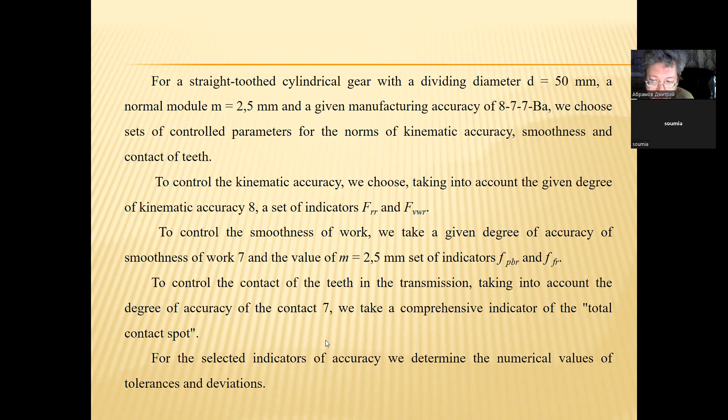For the selected indicators of accuracy, we determine the numerical values of tolerances and deviations. For a given degree of kinematic accuracy, we have kinematic accuracy degree 8. For a given degree of kinematic accuracy, big F suffix r is equal to 45 micrometers and big F suffix vw is equal to 28 micrometers.

For a given accuracy of smooth operation, small f suffix pb is equal to plus minus 14 micrometers. f suffix f is equal to 11 micrometers. And for a given degree of accuracy according to the norms of contact, it's equal to 7. The relative size of the total contact spot is: the height of the tooth not less than 45%, the length of the tooth not less than 60%. So when you do your variant of coursework, you can use these numerical values too.

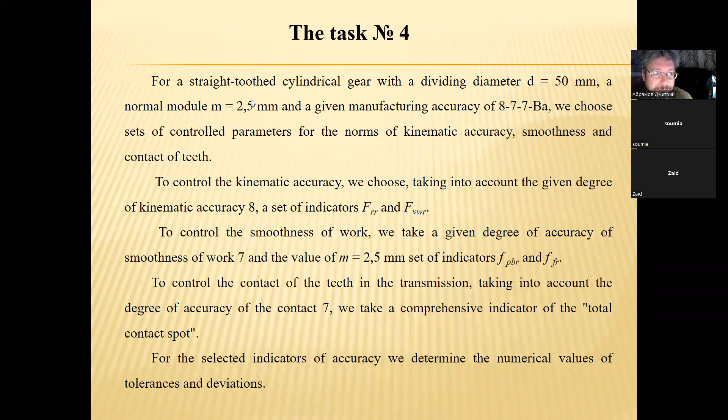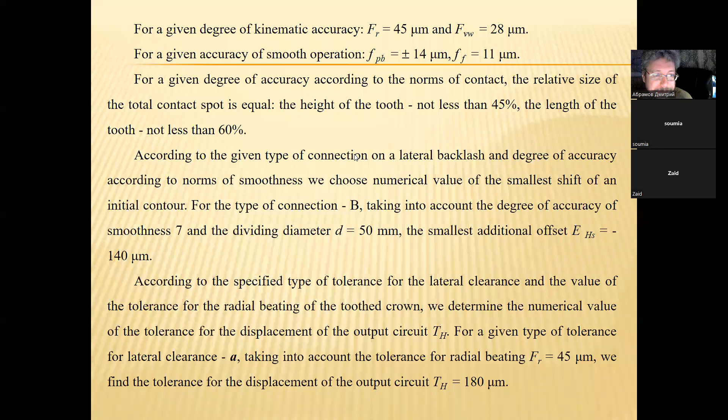Determine the length of the general normal, W suffix 1, for a wheel with a single module. The values of W suffix 1 and Z suffix N placed in the middle column are preferred in the directory. For Z suffix N equal to 3, number of teeth covered, W suffix 1 is equal to 7.66043 millimeters. In your variant, you must choose your Z. So W1 will be equal to 7.66043 millimeters. Then the length of the general normal is 7.66043 millimeters multiplied by module 2.5 millimeters, and we have 19.15 millimeters.

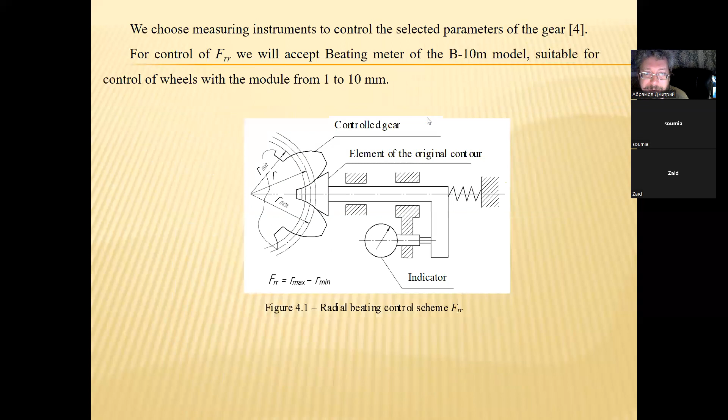The control of small f suffix fr can be performed using an evolventometer model BV 5032, suitable for monitoring wheels with an outer diameter from 20 to 400 millimeters and a module m from 1 to 16 millimeters. Our outer diameter is 50 millimeters, it's between 20 and 400. And our module is equal to 2.5 millimeters, between 1 and 16 millimeters. So we use this evolventometer model BV 5032.

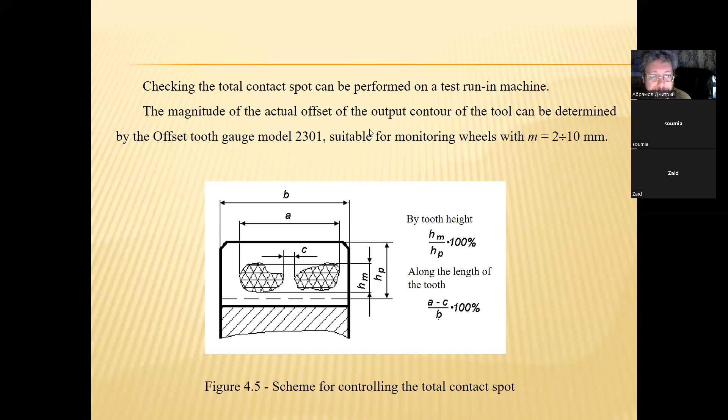And that's how we show the schemes of control of the selected parameters of the gear. And the last, 4.7: make a drawing of the gear on A4 format. There is the gear, diameter of the gear 50 millimeters. Module is equal to 2.5 millimeters. Number of teeth, 20 teeth. Normal original contour by GOST 13755-81. Displacement factor 0. Degree of accuracy 8-7-7 BA.

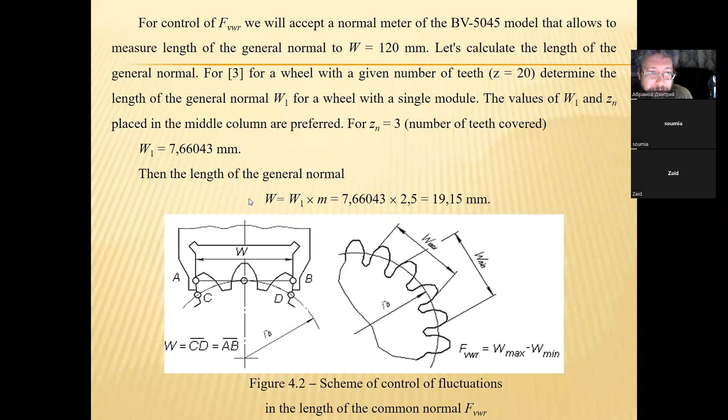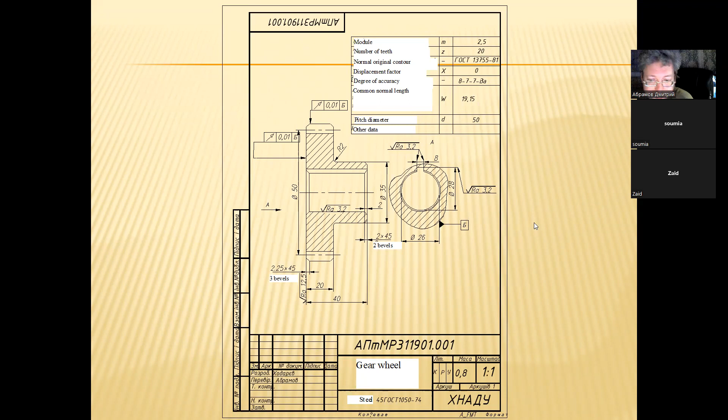Common normal length W, the length of the general normal, is equal to 19.15 millimeters. Pitch diameter small d is equal to 50 millimeters. So there is the drawing of the gear with these parameters. That's all.

Do you have a question about the task number 4?